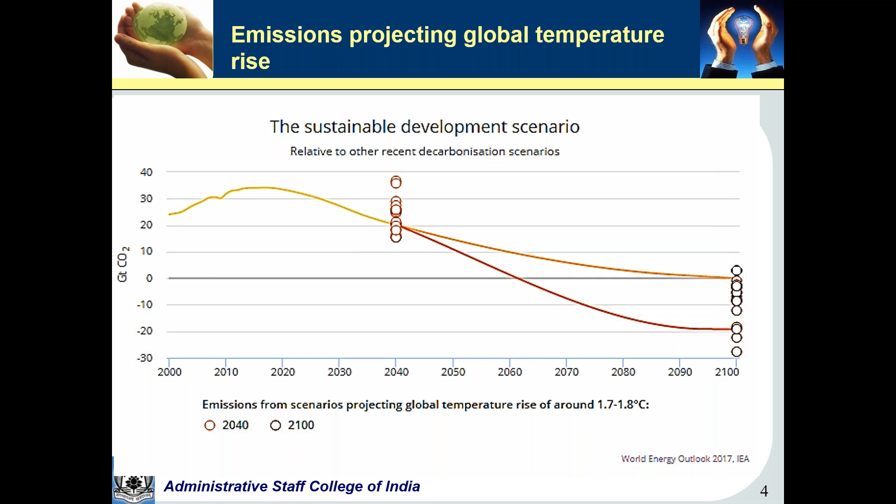As we can see, the new policy scenario suggests that 44% of carbon dioxide emissions can be saved by bringing energy efficiency into all these sectors. 36% contribution can come from renewables, and then slowly we can shift towards these. The sustainable development scenario also suggests these carbon dioxide emission reductions by 2090 to 2100, where all efforts and policies, be it industry, electricity distribution, power or municipalities, must go towards this.

If we think about Indian conditions, the energy saving potential in India is pretty high. In the power sector alone, if we bring energy efficiency in, projections say that by 2031, 109 million tons of oil equivalent can be saved. In the building sector, residential, lighting, commercial buildings, shops and malls, offices, hotels, and space conditioning at home, 4.6 million tons of oil equivalent, hotels 2.6, offices 2.8, residential 10.1, lighting 5.1. So it's a huge potential where we can save this energy in a very effective and big way.

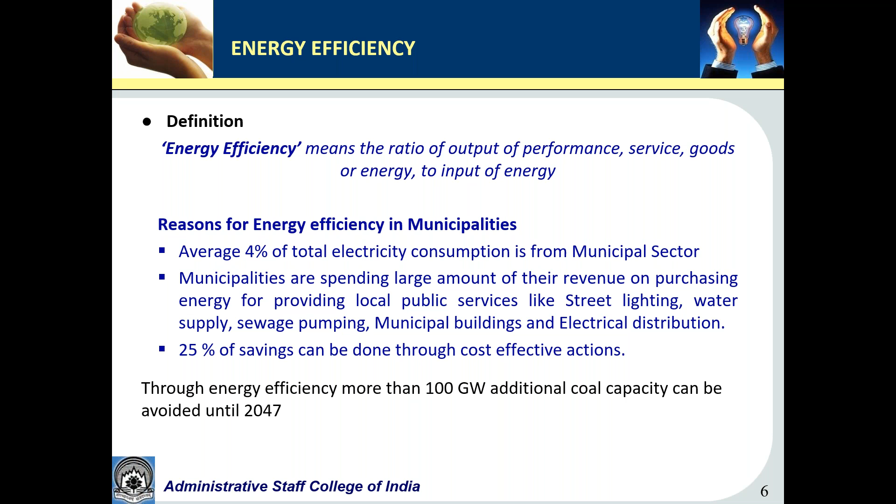The reason for energy efficiency in municipalities: in India, on average 4% of total electricity consumption comes from the municipal sector. Municipalities spend large amounts of their revenue purchasing electricity for local public services like street lighting, water treatment, water supply, sewage pumping, buildings and electrical distribution. 25% savings can be achieved through cost-effective actions if we implement efficient practices in all these sectors. Through energy efficiency, more than 100 gigawatts of additional coal capacity can be avoided until 2047, according to Indian projections.

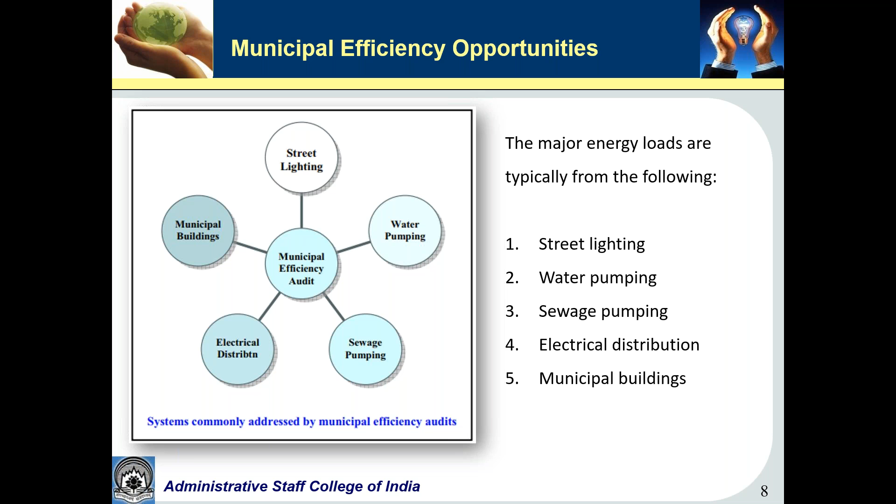Looking at the reasons for energy efficiency projects in municipalities, India is plagued by high operating expenses in the supply of water. Anywhere between 40 to 60% of energy costs arise only from supplying water. 4,800 million units of electricity are wasted every year due to inefficient water pumps, which we can save by effective implementation of energy efficiency measures in pumping systems.

Coming to the building sector, according to the McKinsey Global Report in 2010, 66% of the building stock by 2030 was yet to be constructed. In 9 years, we constructed so many buildings, and built-up area is coming up with the most inefficient practices, like glass buildings. People are not applying insulation properly, and because of this glass, buildings are becoming ovens, because most of India is in a hot and dry or composite climate zone, except a few northern areas.

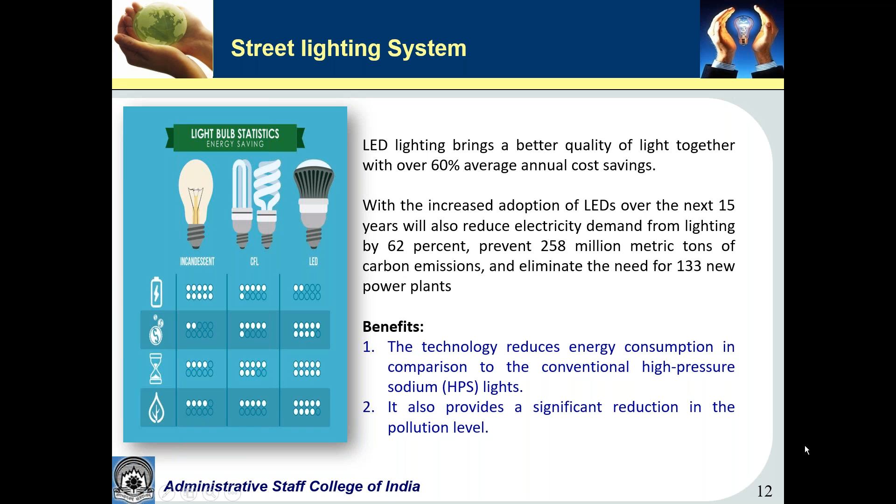So coming to this, as we are talking about energy consumption and potential areas, when we talk about street lights, it is not just about energy inefficient equipment. It has to be designed with a very integrated approach. So only LED street lights won't serve the purpose here.

Selection of energy inefficient equipment and poor design practice of street lights matter, because when you are switching to LED street lights from high pressure sodium vapor lamps or mercury lamps, your entire pole size and fixture size must be designed in a very different way, and those parameters must be specified in your RFP and specifications. And that's how you design a very efficient street lighting system rather than an inefficient one.

In our experience, a few municipalities and urban local bodies just went ahead and replaced the existing conventional street lighting system with just an LED system. It gives very bad results because of the lux level and the angle of the LED fixture, the light won't come onto the road, and the lux level measured at the road afterwards was very low. So it is not just switching to the LED system, but designing the overall system with pole height, LED and light angle, fixture angle, and then the real benefits can be measured.

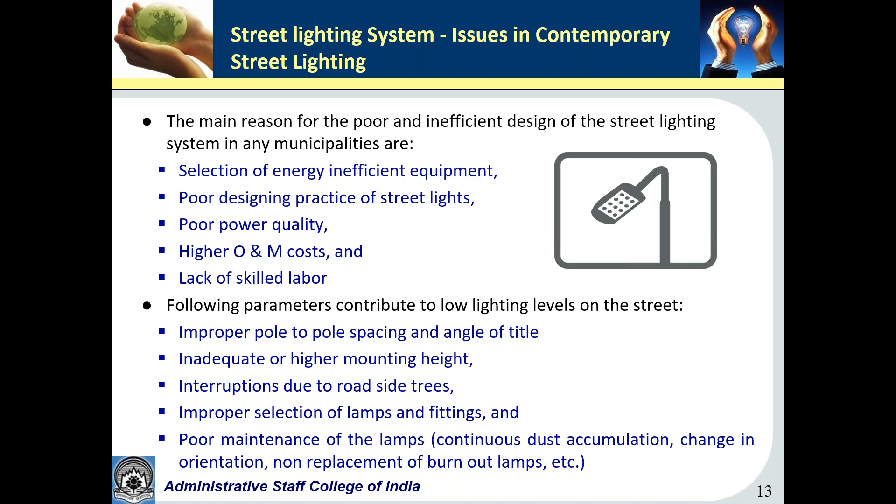So the following parameters really contribute: improper pole-to-pole spacing, angle of tilt, inadequate or higher mounting height, interruptions due to roadside trees, improper selection of lamps and fittings, and poor maintenance. Now we have one very good example of Baroda city's design-based lighting system, with 300% improvement in service delivery, because energy conservation is one aspect, but service delivery is another aspect in municipalities that always has to be considered.

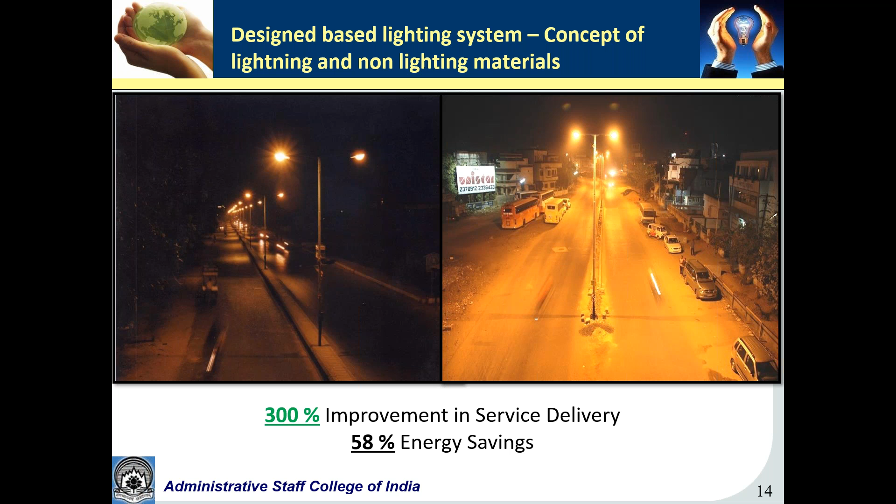And when we integrate energy efficiency with service delivery, that gives tremendously good results. So 300% improvement in service delivery happened, and 58% energy savings were observed in Baroda city. If you see the earlier street lights, the darkness between the two poles is clearly observed. Now the street is very well lit, and even extra light pollution is not there. So these kinds of achievements we can have with energy efficient systems.

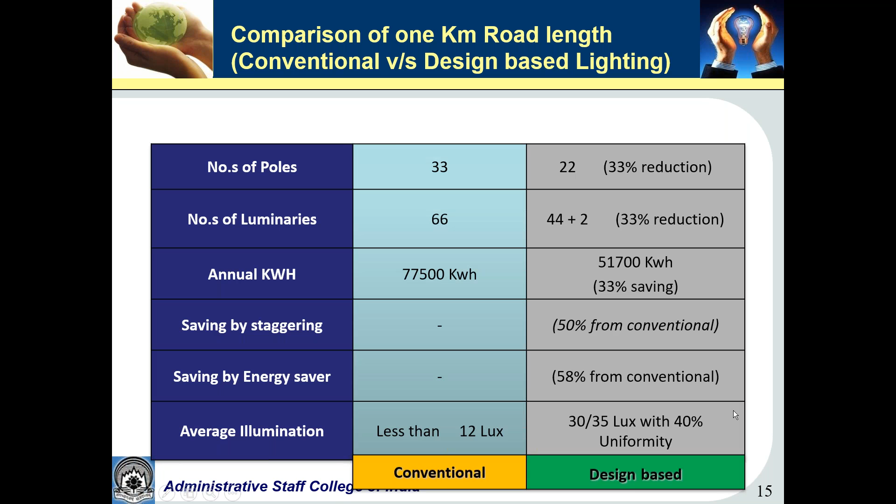So average illumination was 30 to 35 lux with 40% uniformity, and they achieved 58% saving. 33% of saving they have achieved.

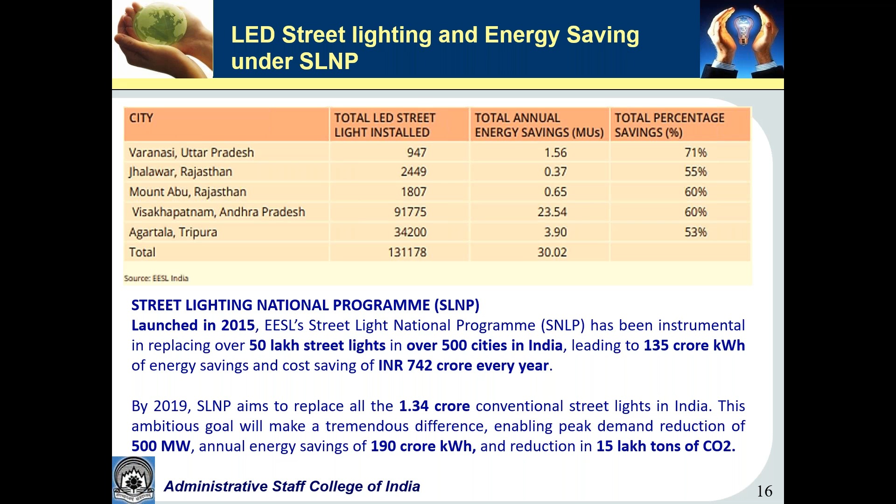It is aiming to replace all 1.34 crore conventional street lights with 15 lakh tons of carbon dioxide emission reduction, and 190 crore units can be saved with this program. So that is a really big target and challenge, but people are accepting because it is giving them service delivery benefit, lighting benefit, as well as financial benefits and strengthening the ULBs. So ULBs are coming forward, and Energy Efficiency Services Limited is working with ULBs in a very effective way.

Coming to the water and sewage pumping system, it is 2.57% relative to total energy consumption by all sectors. More than 20,000 million units of saving potential is there in this. Effective ways are proper maintenance, monitoring, controls, reduction of demand, more efficient pumps, proper pump sizing, and multiple pumps for varying loads.

Because what we observed in our day-to-day working here in India is that most of the pumps are old pumps, and whenever you repair or maintain these pumps, a certain kind of inefficiency adds into that. So pump repairing also affects the entire operation of pumping, and it brings a lot of inefficiency into the system. So replace pumps with super efficient pumps, maintain them properly, and the skills of the maintenance people need to be developed so that whenever maintenance and repair happens, inefficiency does not come.

So it is not just replacing the pumping system, it is an overall integrated system we need to think about, and then real energy efficiency can be achieved in a sustainable way in the pumping and sewage treatment system.

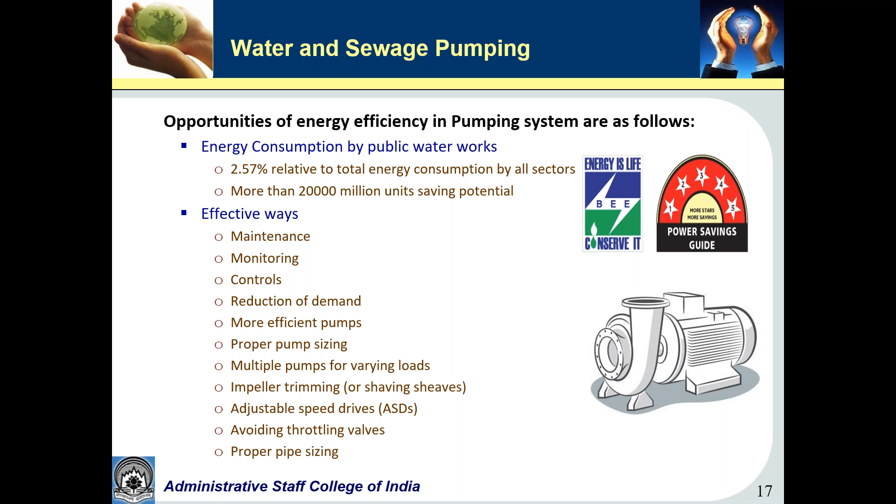Coming to the building sector, as I mentioned, by 2030 almost 66% of the building stock is yet to be constructed. So India went ahead with the Energy Conservation Building Code to construct buildings according to a certain code, where we can save energy at the design stage itself. 1930 million square meters currently exist, and 66% is yet to be built. So it was a great opportunity to convince government buildings as well as the real estate developer community to save energy at the design stage itself.

So the Energy Conservation Building Code was brought by the Bureau of Energy Efficiency in 2007 and 2008, which talks about minimum energy efficiency standards for design and construction of commercial buildings. It is only for commercial buildings because the Energy Conservation Act says the Energy Conservation Building Code must be applicable to all commercial buildings on a mandatory basis. Recently, the Bureau of Energy Efficiency modified the code, and now it is Energy Conservation Building Code 2017. When we started, it encouraged energy efficient design of new buildings and major renovations, meaning both retrofits and

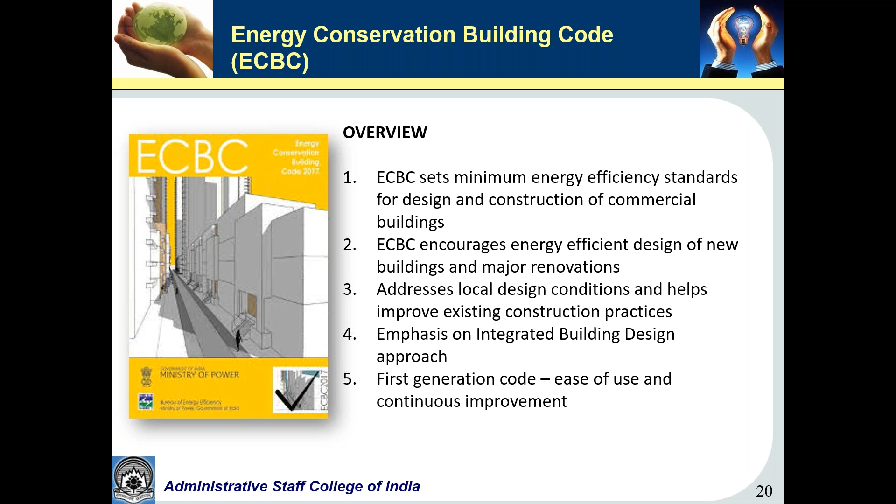This code talks about local design conditions, helps improve existing construction practices, and emphasizes an integrated building design approach, because when you construct a building you have to integrate your construction practices, material procurement, sourcing of material, as well as your designs, HVAC designs, and the use of that building. When you integrate all these at the design stage, that design will give you more efficiency rather than just a prescriptive approach. And ECBC emphasizes the integrated building design approach.

It talks about the building envelope. It talks about heating, ventilation, and air conditioning systems. It talks about lighting systems. It talks about electric power, as I mentioned, the pumps and everything, and solar water and pumping systems.

It gives you prescriptive approach, compliance approach, and whole building performance approach. Prescriptive approach means, if I take an example of envelope, it gives you the code. It gives you certain kind of specifications that glass must have this particular kind of solar heat gain coefficient or visual light transmission. Over and above, it won't allow. Roof resistance, it must be this much of roof resistance. Window to wall ratio, it says that okay, this much of window to wall ratio is allowed, more than that it is not allowed. So these kind of specifications, if you actually follow, that is called prescriptive approach.

But then there are many simulation techniques which are available, where you can combine all those parameters, specify and design your building accordingly. That is called whole building performance approach, which is more flexible, and you can actually trade off, because 5-star hotels may like to put more lights in their lobby, designer lighting systems in their lobby, which are sometimes inefficient. But then they can actually trade off with certain kind of things in the wall insulation, roof insulation and glass usage. So whole building performance gives you flexibility, whereas the prescriptive compliance approach won't give you that kind of flexibility. So these are the approaches.

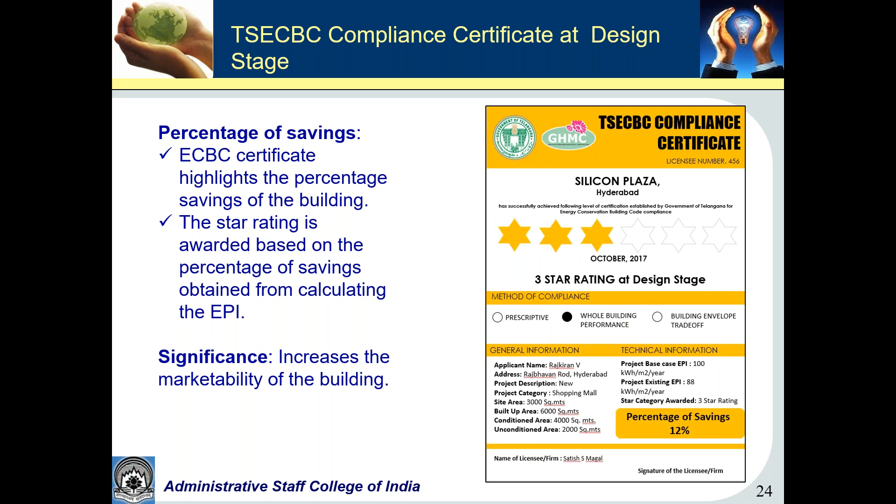So that is a very successful case here in Telangana, and at occupancy stage also we issue these certificates and then we check whether there is 12% savings according to the design stage or not. And I can tell you here that the IKEA building, which is the first IKEA store in India, in Hyderabad, got the first occupancy stage certificate also in Hyderabad.

So it is now a full-fledged system, and we are trying to improve this system with certain kinds of energy passport systems, where buildings can showcase in the next 3 years post construction that we are saving energy according to the energy savings which we have submitted to the urban local body at design stage as well as at occupancy stage. So based on that, their market value, lease value, rental value and sale value also can be linked in future. And that's how real estate developers as well as customers are coming forward to adopt this system in a very effective and efficient way.

Government has already said that we are not going to give property tax incentives or other incentive systems, because energy conservation in buildings itself gives certain benefits to the consumers as well as the people who are staying in that building or using that building. And that's how the burden on the urban local body is less, but the energy saving potential is pretty high with these innovative mechanisms. And ease of governance and market instruments for sale of these properties are actually attracting the real estate developers as well as the consumers.

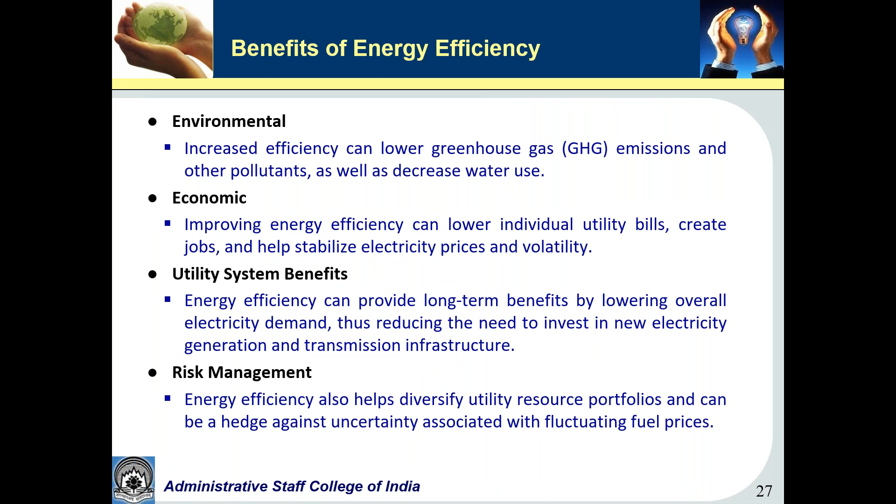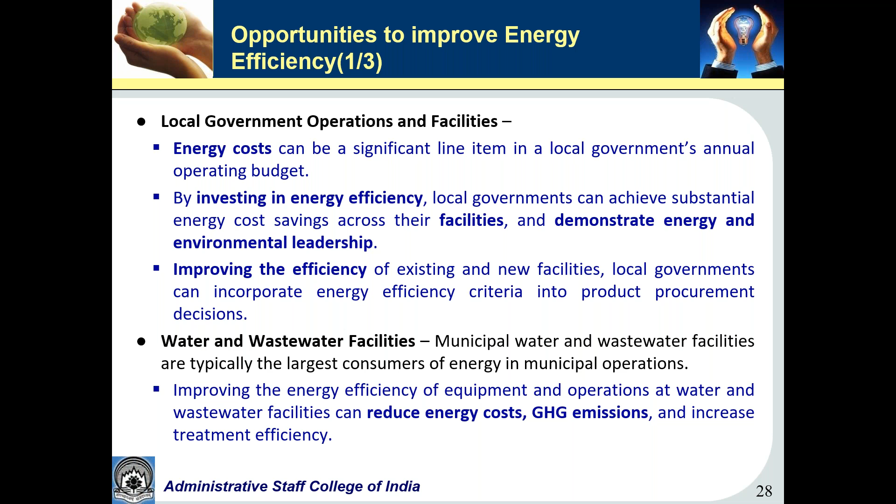So as I mentioned, with all these things, there are environmental benefits, economic benefits, utility system benefits, and risk management can happen. We have an opportunity on energy costs by investing in energy efficiency. Local governments can achieve substantial energy cost savings across their facilities, improving the efficiency of existing and new facilities. Local governments can incorporate energy efficiency criteria into product procurement decisions. Water and wastewater facilities, where they can actually put these kinds of energy efficiency systems. Government buildings are very important places where we can actually demonstrate.

And now the government declared that in Telangana and even in Maharashtra, one of the states in India, 1,000 old buildings are going for retrofit to save more and more energy. So not only new buildings, but old buildings also, people are coming forward for retrofit, and those will be the demonstration projects where other people can actually come forward to put this.

And one more program, in fact, I didn't share in the presentation, but I want to share it with you. Recently, we have launched the Cool Roofs program, because of the emissivity of white roofs on top, which is a very prevalent, ancient practice in northern India and western India, with mosaic tiles on the roof that actually reflect the heat. And with new construction practices, somehow we are not constructing our roofs according to these cool roof practices. Now we are encouraging it in all municipalities.

This is one case where it is disaster management for heat waves and reducing the urban heat island effect also, as well as saving energy, because we have experimented in a few of the slums in Hyderabad, and that gave very good results, a 2 to 3 degrees centigrade reduction in ambient temperature inside the house, which also reduces your fan load as well as your HVAC load.

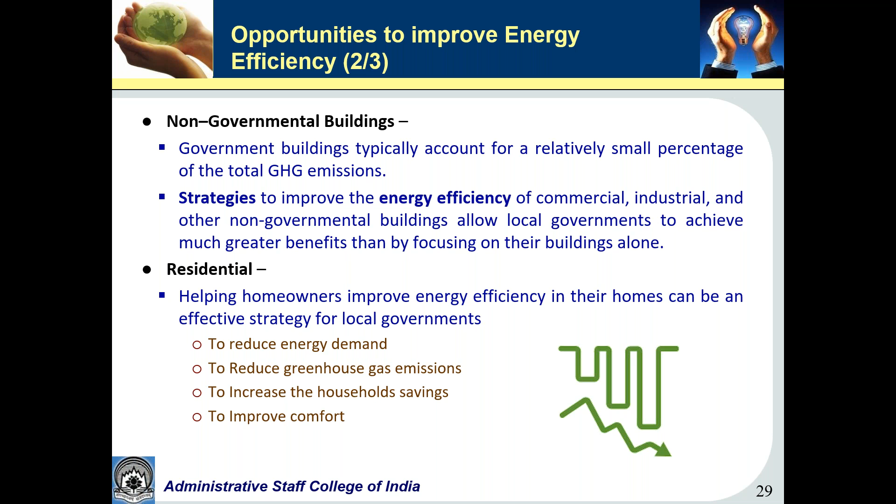So residential buildings are also a huge load. The Energy Conservation Building Code is applicable to commercial buildings, but the Bureau of Energy Efficiency brought up a residential building code also. As of now we are not making it mandatory, but we are implementing residential building codes also. So with this, I think these are the steps for developing municipal energy efficiency projects. Other panelists are also going to talk on this, so everyone knows about this.

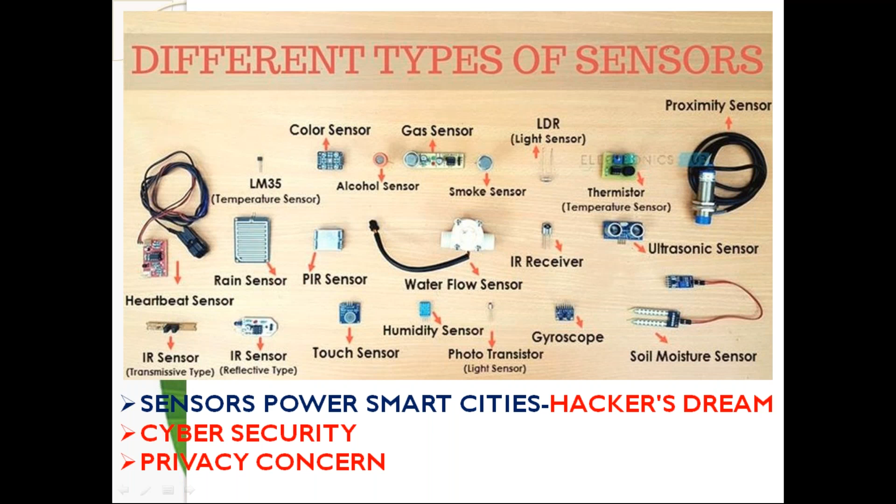You need to be smart to what level? In SAARC countries, India is really coming up. They have taken up a target of more than 100 cities to be developed as smart cities. China is doing excellent. I will say that they have got smart shopping malls. I will show a small video. In a shopping mall, the main hassle is payment. You buy a lot of things, and then you find a big queue.

So they have developed it so that the moment you enter the shopping mall, you just punch your credit card and it is taken, and you buy everything and you come out. And it is so scientific that it is also theft proof. So your time is saved, and the time of the store management is also saved. They have gone to such a level that through a retina scanner, the moment you enter the shopping mall, you don't even need to punch your card. You buy the things and you come out, and on your smartphone you will find that whatever you have purchased has been debited.

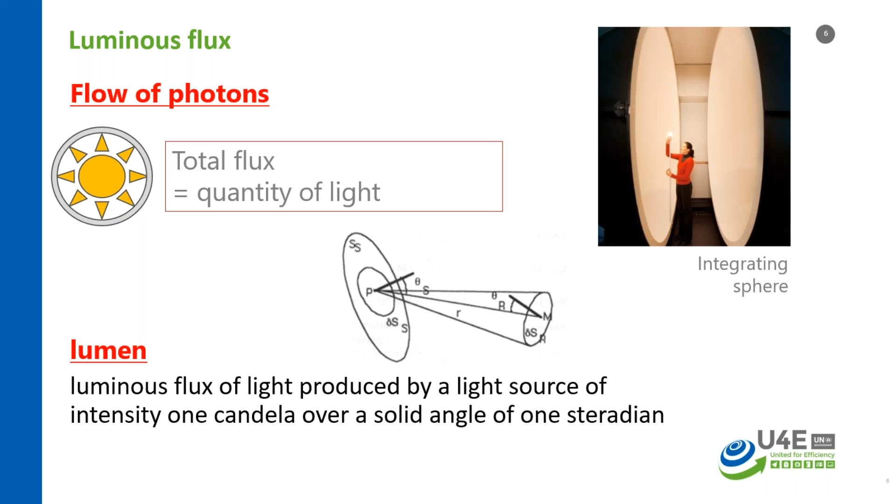So next, illumination, very important for street lighting, because often we talk about illumination on the pavement. This is normative most of the time. This is measured in lux. 1 lux is the flux of 1 lumen arriving on 1 square meter. So the quantity of light on a surface per square meter. This is lux.

Okay, so this is quite easy to measure compared to flux. Lux, you measure it with a lux meter. That's why most of the time we talk about quantity of light on the pavement in terms of lux. So for example, if you want to light a typical road, you have to put 15 lux, let's say. You don't talk about lumens. Sorry. So next slide. And after this I think we're nearly finished with physics, so it's quite easy.

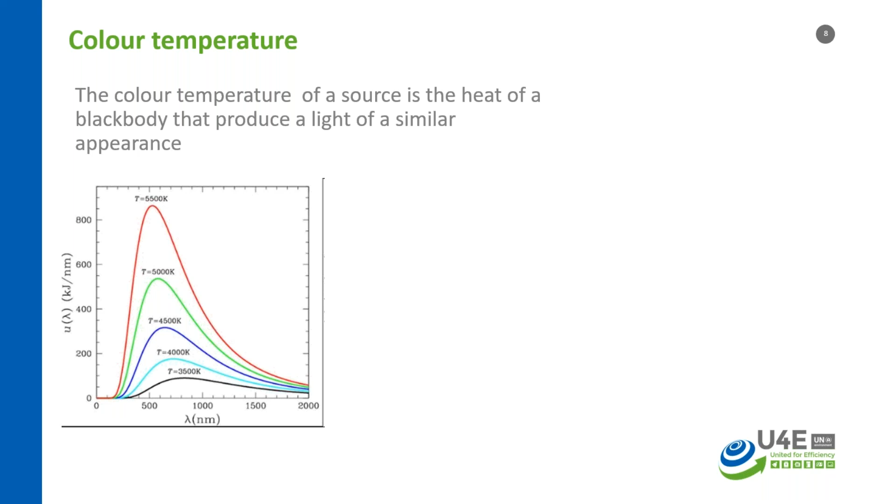The color temperature. The color temperature is the color of the light, let's say. So we won't go into details about how we found it. This is a black body curve. A black body emits one particular maximum wavelength, depending only on the temperature. Well, whatever.

We talk about color temperature typically for white light, mostly for white light, but it goes from, let's say, red to blue or white-blue light, and this is how the color looks. So you have all kinds of color temperatures for different light sources. When it's a red or blue light source, you cannot honestly talk about color temperature, but usually for light that is used for lighting humans or lighting the street or indoors, we can talk about color temperature.

So we'll see an example later. The color rendering index: this is also the last but not the least parameter. This is the ability of a light source to keep the real color of an object. It means the color you will see during the day with sunlight. So it's from 0 to 100. At 0 you cannot see any color. At 100 you can distinguish all colors.

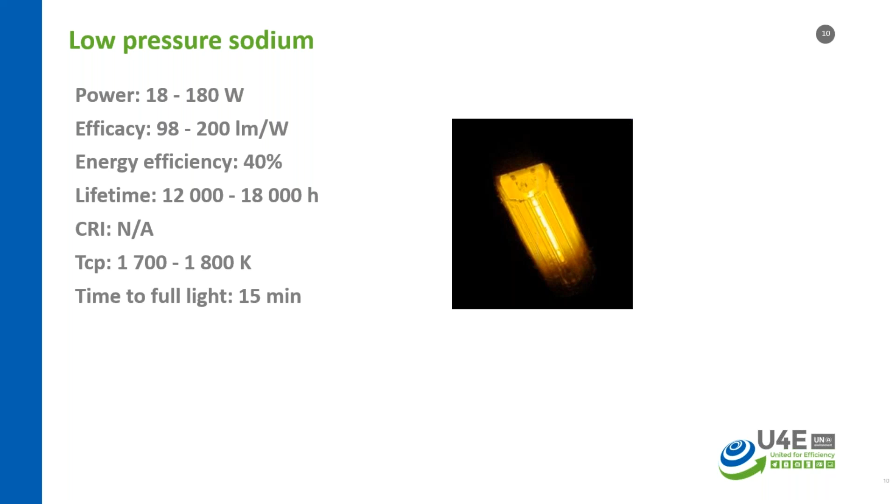It can reach 131 lumens per watt. The color rendering index is not so good, but you can talk about it. The color temperature is quite low, 2150 Kelvin, because it's yellow. And lifetime is quite good. So this is a very common light, and it's quite efficient. But we'll see we have better now, which is also good for smart cities.

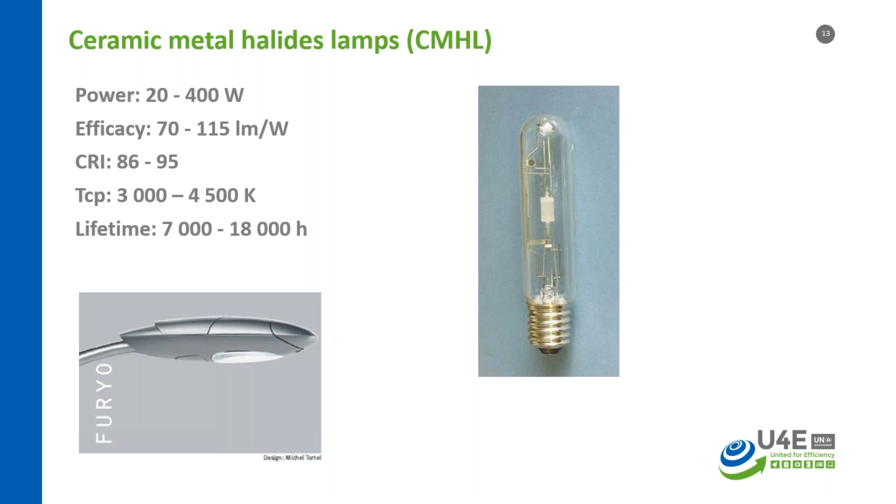It's not so good. The color rendering index, well, not that bad, but it's not efficient, and it contains a lot of mercury. We will see it later. All lamps that we were talking about are discharge lamps and contain mercury. You cannot imagine discharge lamps commonly used, not in laboratory of course, without mercury. And mercury is harmful. I checked for some of your countries, you did sign some protocols to get rid of mercury and to recycle it. So this is an important parameter to consider.

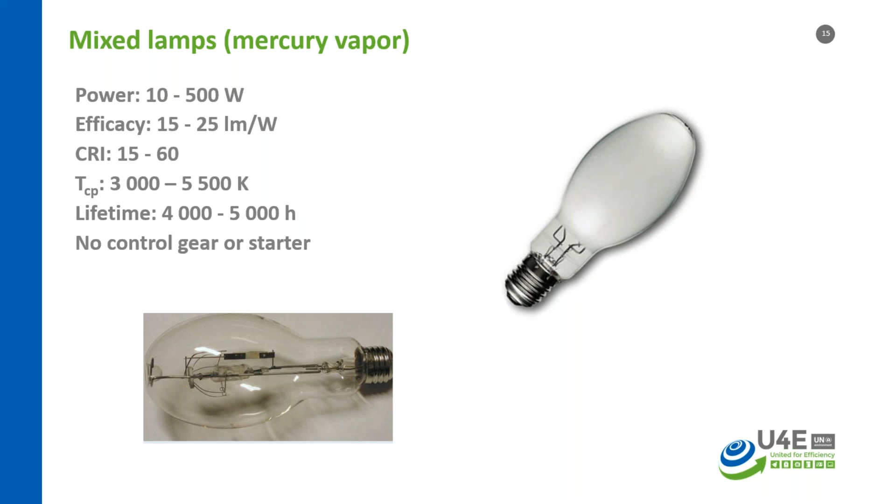You have mixed lamp. I guess you don't use it. It's an old lamp, not efficient at all, mixing between incandescent and high pressure mercury lamps. I don't want to talk too much about it, except if you have questions. You have induction lamps also. You can find a lot in your country, actually, in Asia.

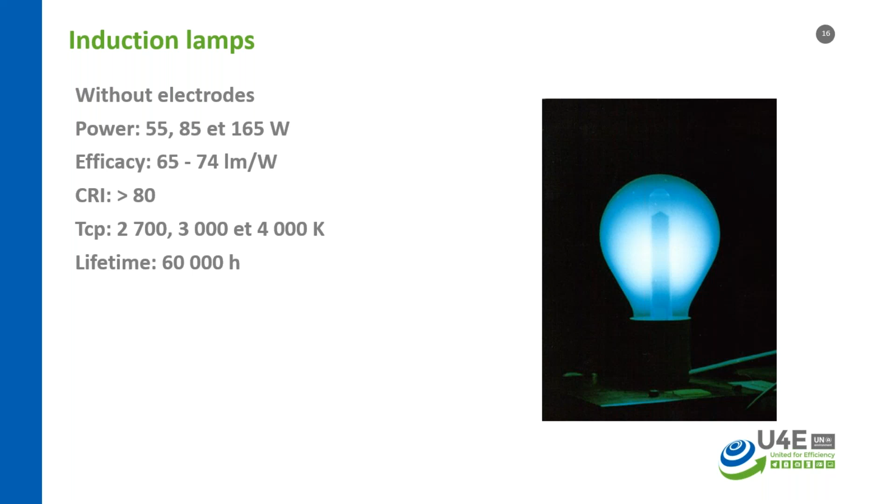This is a lamp without electrode. You have an antenna in the center, you can see it on the picture, and then you create a magnetic field. So electrons are turning and emitting light. After that, I don't go into details. Quite efficient, a very good lifetime, 60,000 hours, so very good because you don't have electrode, but not that efficient actually. But a good competitor compared to LED, of course.

LED is, we think, the future for all kind of lighting actually. A few years ago, I wouldn't have said that. I would have said LEDs are good for domestic lighting, indoor lighting, but not for high power, not for street lighting, because we were not that efficient to dissipate the heat of LEDs. But now LEDs are ready for all kind of application, and we see that. So the power can range from 20 to 100 watts and even more actually.

The efficacy depends a lot on the luminaire, but it's common to find an efficacy higher than 100 lumen per watt. A good color rendering index, so 70 is the lowest. Actually, you can reach even 90. The color temperature, you can have all kind of color from red to blue, let's say. So you can choose your color, and the lifetime you can have from 20,000 to 100,000 hours. So this is a very interesting light source.

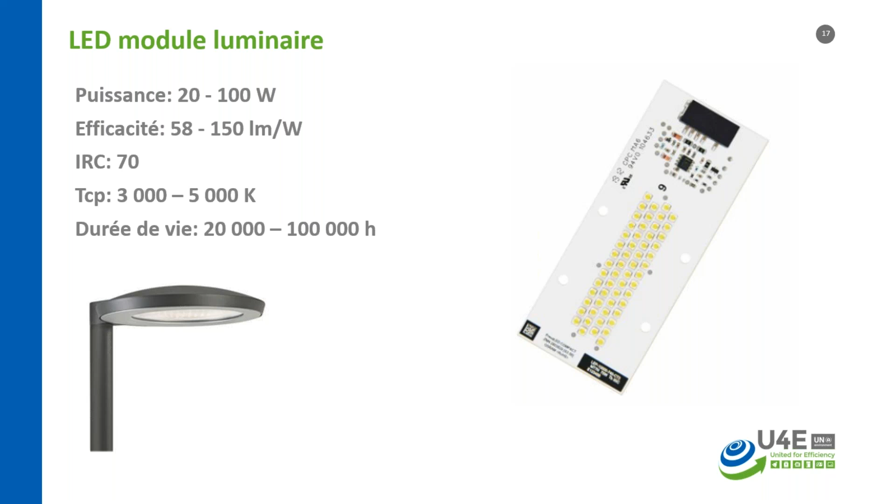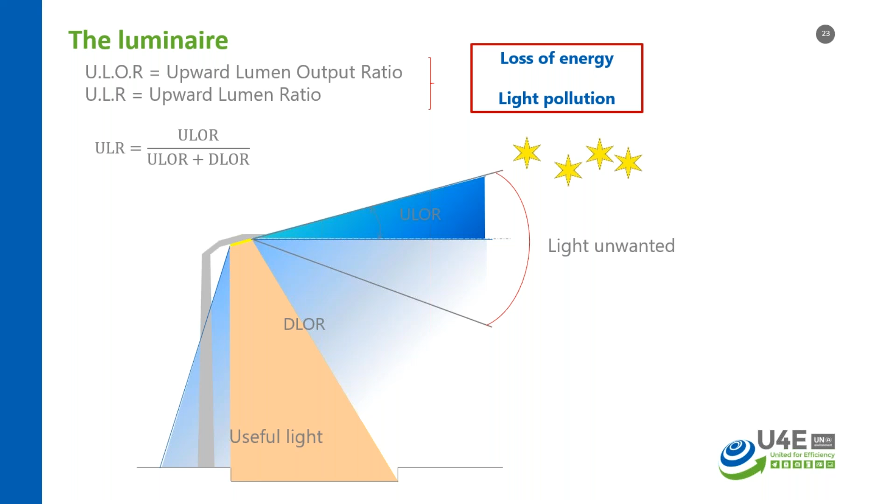So one simple parameter to limit light pollution is to say, okay, we want a luminaire with an upward lumen output ratio of 0%. Now we can do it. A few years ago, it was quite impossible because you tilt the luminaire to light all the street and so on. But now it's possible. So this is one advice. Please, when you buy a luminaire, whatever it is made for, please buy ULOR 0%.

Think about this, this is smart lighting already: dimming and presence detector. Think about it. Dimming is when you reduce the quantity of light during the night, because the need on the road is changing during the night. For example, in a commercial area at 7 p.m., you have a lot of people, and so you need a lot of light for security reasons and because there are people.

But at, let's say, midnight, you have nobody in that area. All shops are closed and you have nobody, so you need less light. Here it's at 11 p.m. you need less light. And once again, when shops are opening at 6 or 7, let's say, you need light again until the sun is shining.

So this is dimming. You can take into account the needs of people, the needs of light on a particular street, which are changing during the night, with dimming. And it's quite simple to dim a luminaire; you have a simple tool to do it. I don't have time to go into detail, but you can save, let's say, 23% in that particular example.

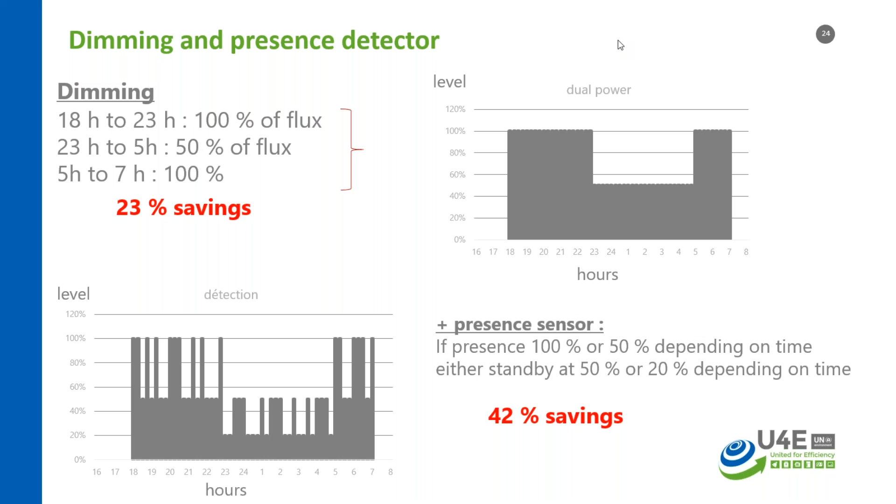Now we have very good presence detectors. You can even have a camera, shape recognition, accident recognition, and whatever. It's quite crazy what you can do. And once again, you have street lighting everywhere, so depending on what you want to see, you just put a detector on your poles, and you see all that's happening in the city.

So now I wanted to talk about off-grid street lighting. I think it's very useful, even if we talk about smart cities and big cities. Off-grid street lighting can be used everywhere now, even if you have the grid, because most of the time the electrical network is not in good shape, and you can have, for example, flooding, and you have to do work on the grid.

It costs a lot to maintain a good electrical grid only for street lighting. Of course, when you use it for other purposes, okay, you use it. But most of the time in some cities, it's only used for street lighting. And if you don't have a good grid, you must think about off-grid street lighting.

I won't go into detail, but here you have a comprehensive guide produced by the International Solar Alliance, an international initiative that began between France and India, but now a lot of countries have joined. It covers quality, how you should think about an off-grid street lighting project, how you should go for the financial setup, your design, implementation, how you should consult people, engage different stakeholders and engage the community, and so on. The preliminary design used for this guide, I made it actually.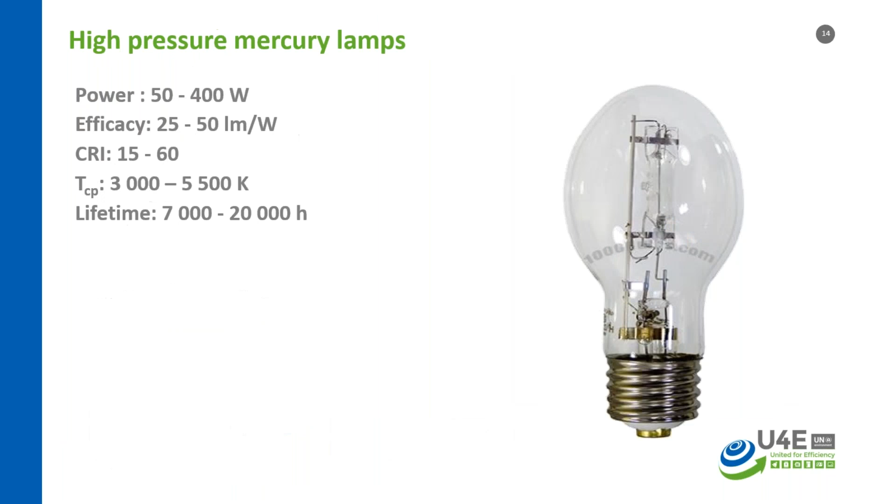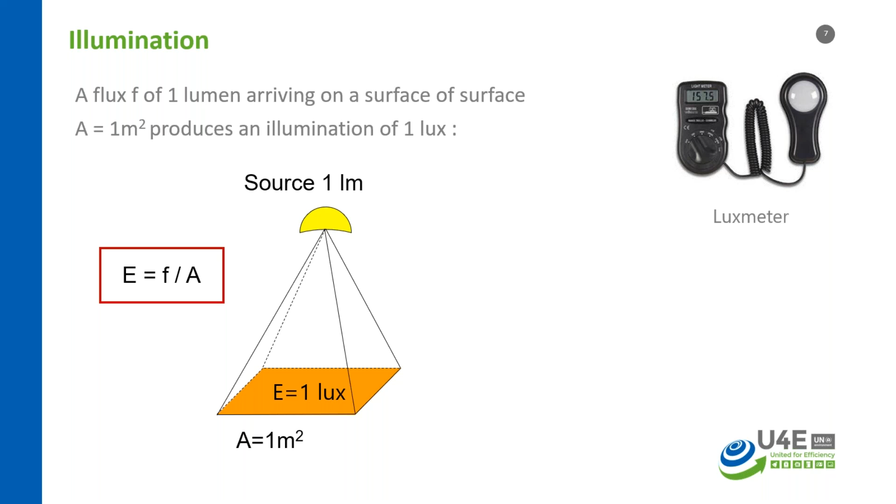Okay, so this is normally a normative. You can see a lot of norms that talk about the illuminance level that you have to put on places. Uniformity: you can have between poles a dark spot in the middle, and it's measured by uniformity of light. Uniformity is the minimum illuminance divided by the average illuminance between those two poles. It must be higher. Sorry, I didn't put the sign, higher than 0.4 to have a good illumination of your street.

Duration of light at full power. This is normally the advice before dimming or presence detector. Minimum level of light when dimming. You can do dimming everywhere, but you have to maintain a minimum level of light, especially for main roads. It's important to maintain a minimum level. Light control: for main roads, you control all luminaires together. You can have a remote control for the light, and you control all luminaires on the same road. So people are not disturbed by a different level of light depending on the luminaire.

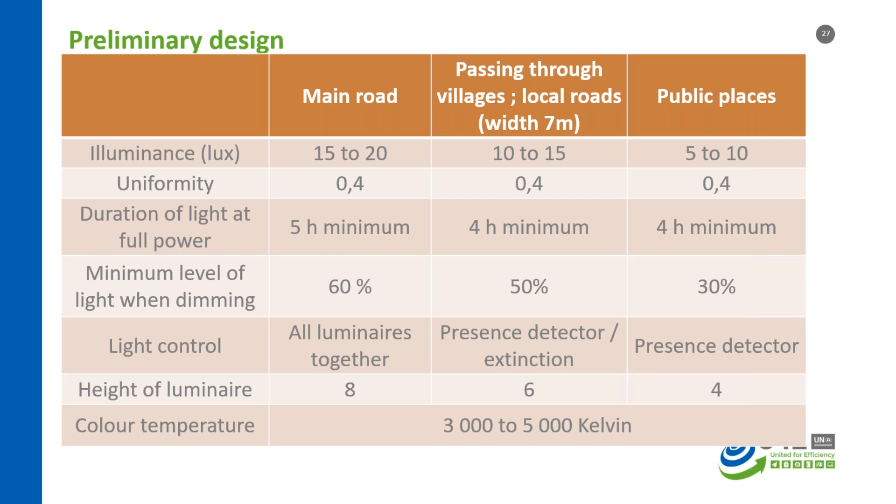Quality criteria of your system, because a solar lighting system is quite a complex system. You have a photovoltaic panel, you have a battery, you have a detector, and you have your luminaire by itself. So we designed, with some people and some experience, quite easy criteria to check. First one is the power of your photovoltaic module in watt peak divided by the power of the luminaire must be higher than, let's say, 2 or 3. This is a ratio that you can easily check. The power of your solar panel divided by the power of your light source must be higher than 3, let's say.

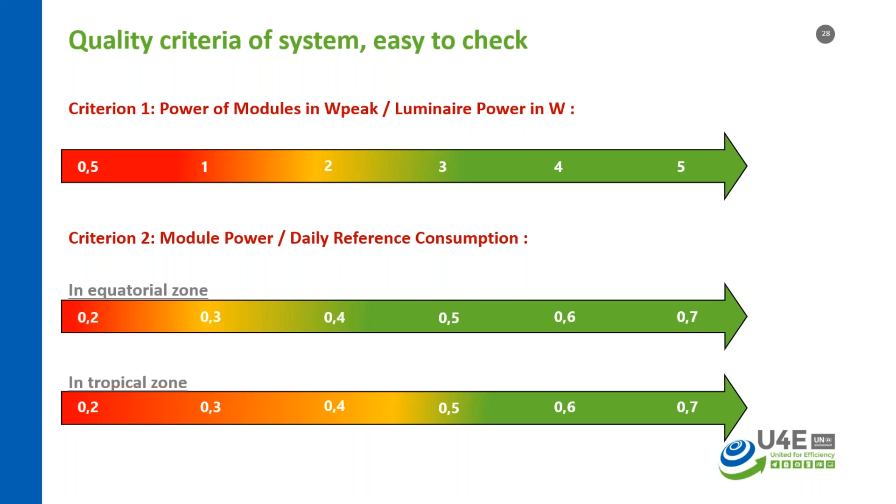Second one, the power of your solar panel divided by your daily reference consumption. I mean, if you light, for example, 5 hours with 20 watts, it's 5 multiplied by 20, 100 watt hours. Okay, so your module power divided by your reference consumption must be higher than 0.5, 0.6. Also for solar lighting, take care of batteries, battery technology. There are 3 kinds of batteries that I used. Lithium ion, that is very common for cell phones or whatever.

Nickel and NiMH, I don't remember how you call it in English, but this is nickel batteries, let's say, and lead batteries. Of course, lead is very attractive because lead batteries are quite cheap compared to other kinds of batteries. But if you consider the total cost of ownership, you can use only 10%, let's say, of a lead battery.

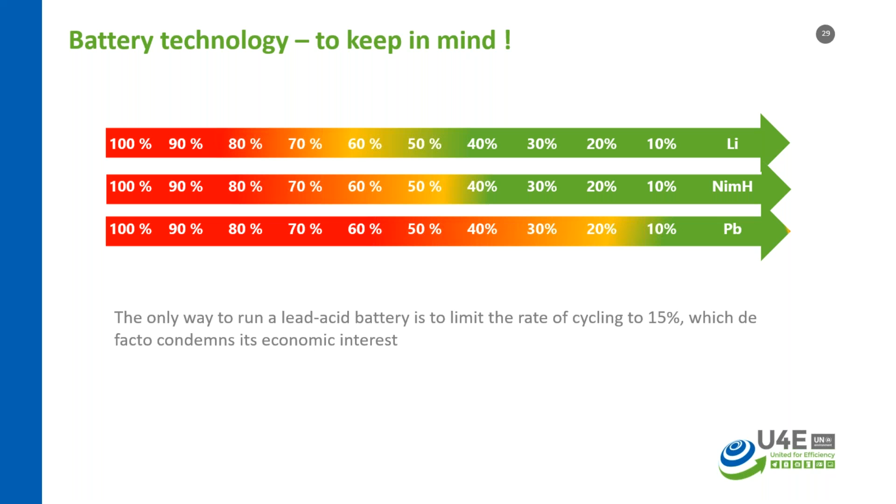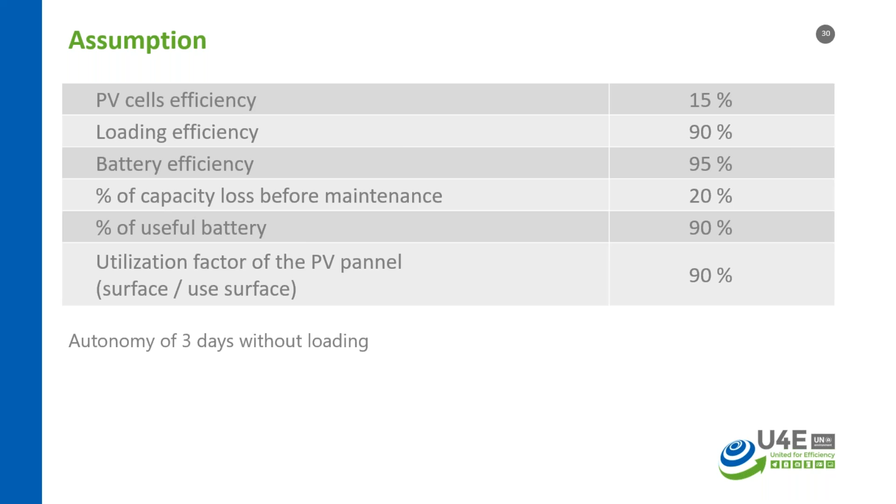So next slide, sorry. Here I will show you a design tool for solar street lighting that you can use. So I took some assumptions. I don't want to go into details, but here are design tools. So this is for a particular irradiation in watt hours per square meter per day. And it's something that we can discuss later, but depending on the area you want to light, the power and so on, you have the surface of the solar panel, the capacity of the battery you should put, and so on. So this is a complete design tool.

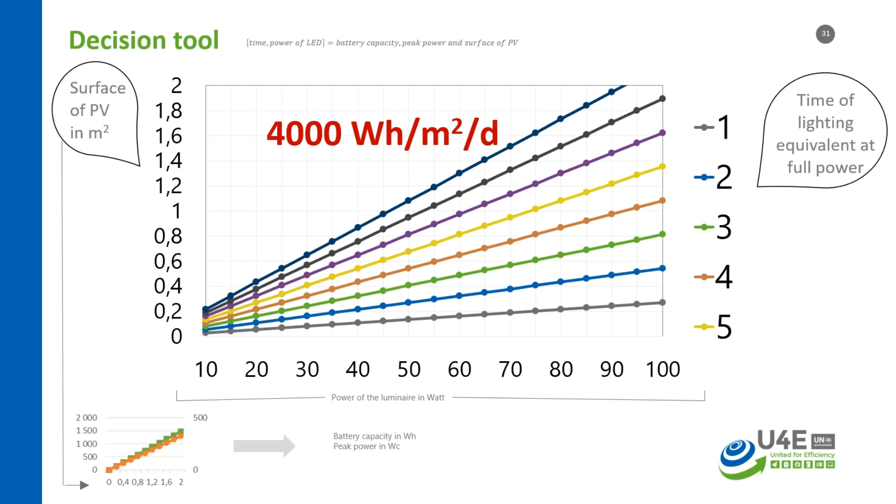A comprehensive approach, last slide. For street lighting, you have to do a pre-diagnostic to assess your needs, your possible savings. Then you decide whether it's worth going for a real diagnostic with engineers and so on, because it can cost a lot, but most of the time it's worth it. So you go for an operational and technical assessment, planning, budget.

Very important, use the new tools of today. The presenter before me was talking about it. You use your computer basically, and your geographical information system, so you can remotely control the lights in your city. Financing is important, with energy performance contracts, which are quite efficient contracts, works, and sustainability. This is the last point, but think about maintenance and anticipate your budget for maintenance, when you have to change the light, or even when you have to clean your luminaire.